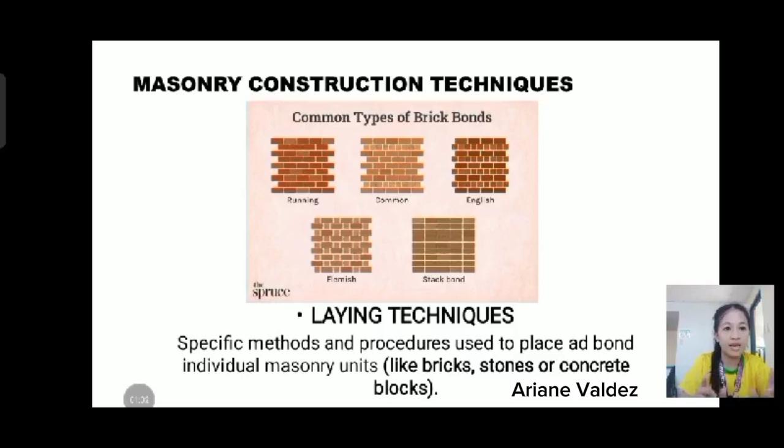While the image doesn't show any actual reinforcement, we can discuss how the different bonding patterns might lend themselves to our necessities, different approaches to reinforcement, and how their structure affects strength.

And now we have running bond. We need to remember that running bond is the simplest and most common bond. It only consists of lengthwise bricks and vertical joints between bricks.

Because we see that there are so many vertical joints, the running bond will benefit more from more frequent horizontal reinforcements like ladder or truss mesh, to prevent cracking along those weak planes. But that doesn't mean we don't need vertical reinforcement. We also need vertical reinforcement at the corners and intersections.

So running bond is used in residential buildings, garden walls, landscaping, interior work, brick veneers, or paving and patios.

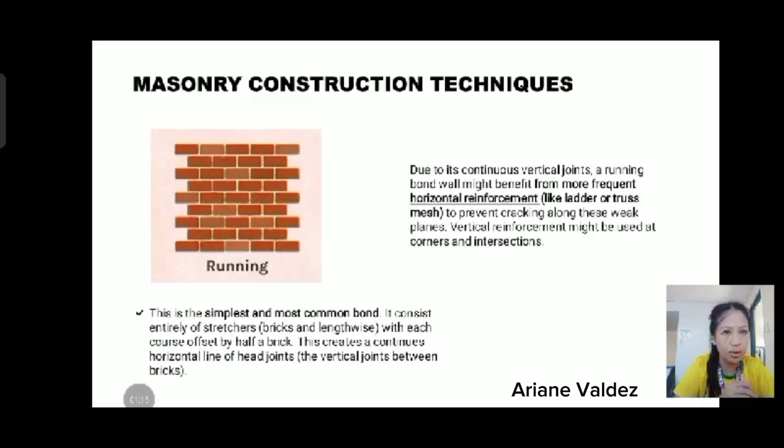Next we have the common bond, also called the American bond. This bond features courses of stretchers with a header course, bricks laid with their short end facing out, at regular intervals. The header courses help tie the wall together laterally.

So when we say laterally, it means one row has the long side showing. Then right above or below it, there are short ends of the bricks. So looking sideways, you have straight rows of either short, short, short, then long side, long side, long side.

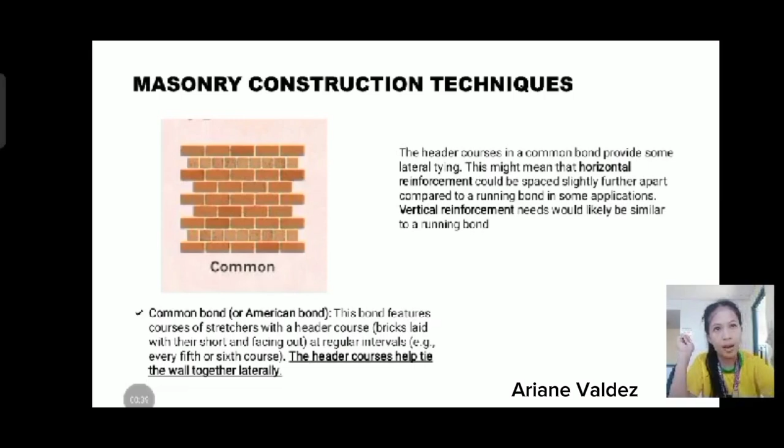Next we have English bond. This bond alternates courses of headers and stretchers. The head joints in the stretcher courses are centered above the stretchers in the course below. This bond is known for its strength.

So we see there are headers, then after the headers there are long bricks, alternating bricks. This alternating of headers and stretchers creates a very well interlocked wall, offering good inherent strength.

The robust interlock could potentially reduce the need for frequent horizontal reinforcement compared to running bond in some less demanding applications. Vertical reinforcement would still be important in English bond.

So this bond is used in load-bearing walls, engineering projects, and traditional buildings.

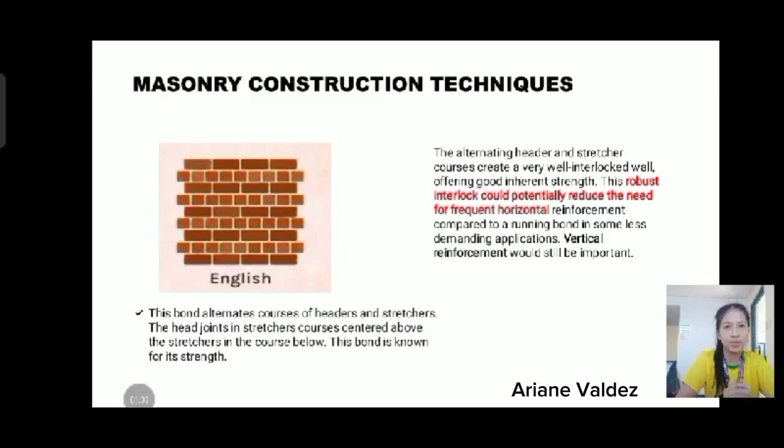Next we have Flemish bond. Here we see that the headers, or the small bricks, are in the middle of the long bricks. Similar to English bond, with stretchers, alternating headers and stretchers in each course create strong and well interlocked structures.

The potential for horizontal reinforcement might be comparable to or slightly less than running bond in certain scenarios. Of course, vertical reinforcement remains important.

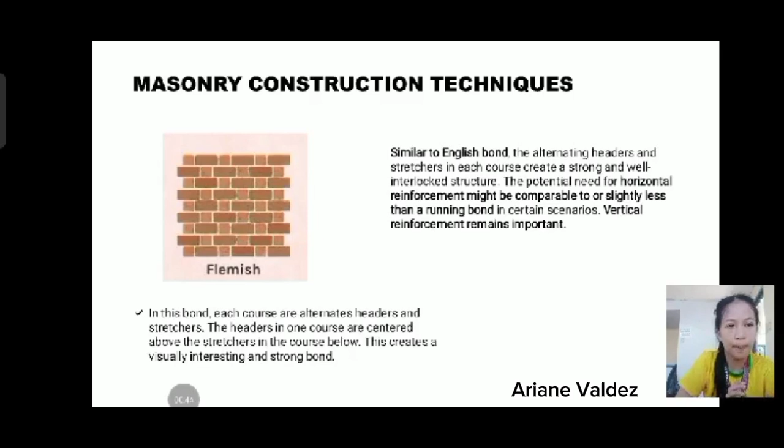And lastly, we have the stack bond. Stack bond is a purely decorative bond, where bricks are laid directly on top of each other with continuous vertical joints. It offers the least amount of structural strength on its own and typically requires additional reinforcement.

Because it has continuous joints, the stack bond has very little inherent lateral strength. Earlier we discussed what lateral means. It almost always requires significant reinforcement, both horizontal and vertical.

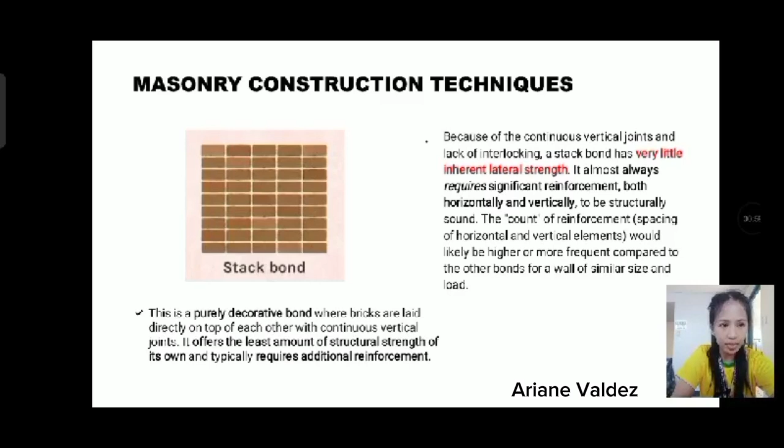Now we'll talk about their differences in strength. English and Flemish are generally considered the strongest inherent bonds due to excellent interlocking of headers and stretchers in alternating courses or within the same course.

They distribute loads effectively. Next is common bond. Common bond offers good strength due to the header courses tying the wall together laterally. Its strength is generally better than a running bond.

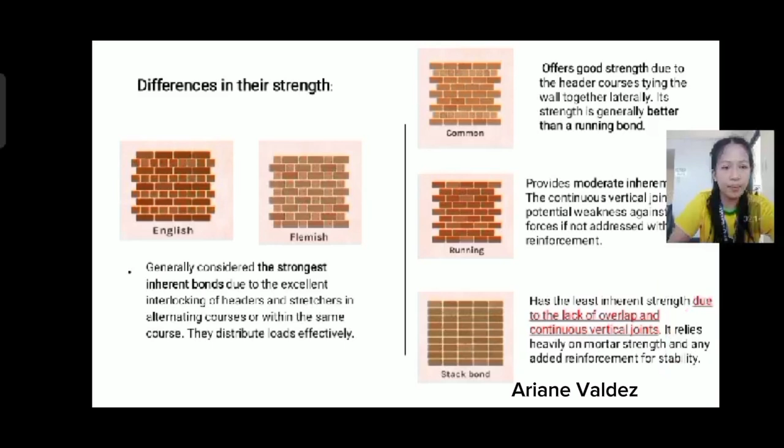Next is running bond. It provides moderate inherent strength. The continuous vertical joints are potential weakness against lateral forces if not addressed with reinforcements. Lastly, the stack bond has the least inherent strength due to the lack of overlap and continuous vertical joints. It relies heavily on mortar strength and any added reinforcement for stability.

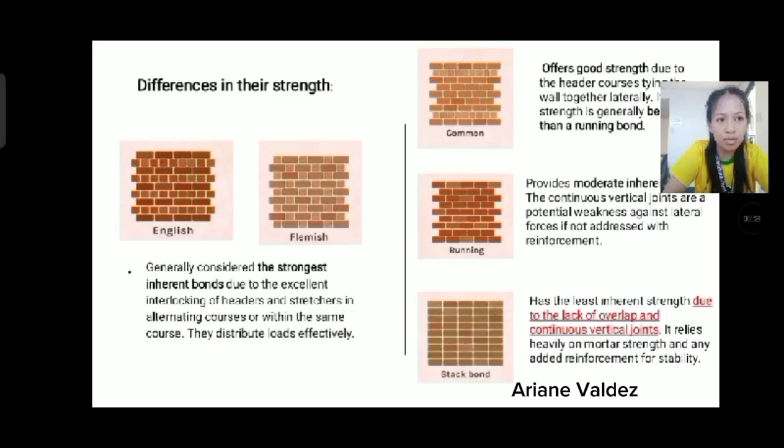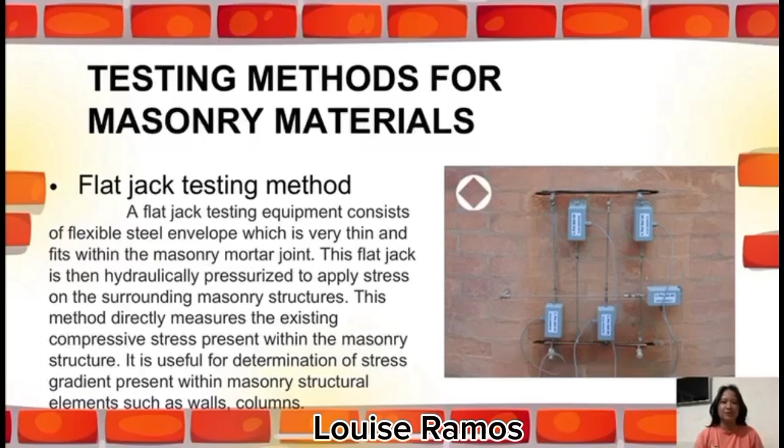These are the testing methods for masonry materials. The first one is the flat jack testing method. It works by creating a slot or cut in masonry, typically along a mortar bed joint. The next step is inserting the flat jack, then it is pressurized using a hydraulic pump, gradually increasing the pressure until it is restored to the condition before the cut. This method directly measures the existing compressive stress present within the masonry structure. It is useful for determination of stress gradient present within masonry structural elements such as walls and columns.

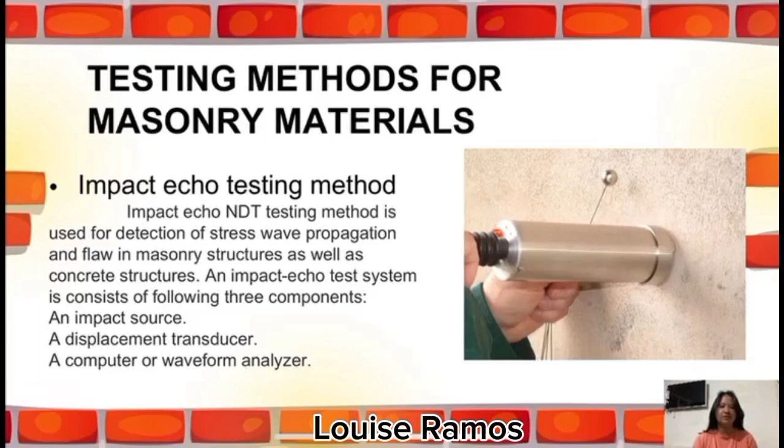The second testing method is the impact echo testing method. In this method, you tap a steel ball that generates stress waves which travel through the masonry material. It can be used to accurately measure the thickness of masonry walls and to locate internal defects such as cracks, voids, and honeycombing.

The next method is the impulse radar testing method. It uses electromagnetic waves to assess masonry structures by identifying voids, cracks, wall thickness, structural composition, and moisture content.

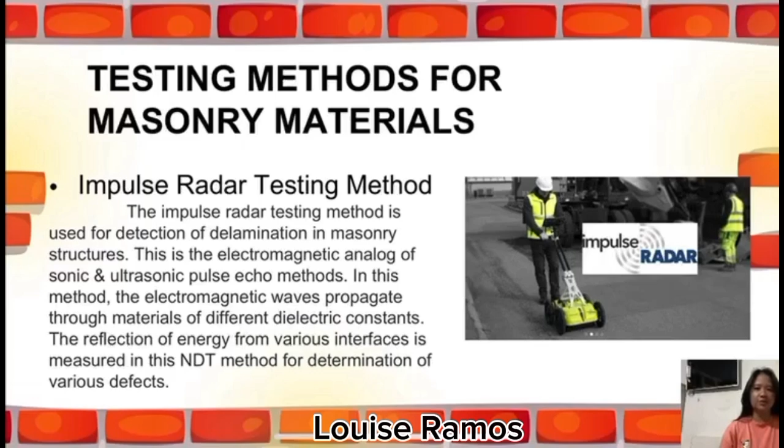The next testing method for masonry materials is infrared thermography. This non-destructive test is conducted to determine subsurface delamination in masonry structures. It is also used to detect internal voids and cracks. Infrared thermographic method gives a fairly accurate picture about the condition of masonry elements inside and can be effectively applied for larger surfaces.

Infrared thermography is a way to check for problems inside brick or stone walls without having to break them open. It uses a special camera that sees heat, because damaged areas like cracks or hollow spots have different temperatures than the rest of the wall. The camera can create a picture showing where these problems are. This is helpful for checking large areas quickly and getting a good idea of the wall condition.

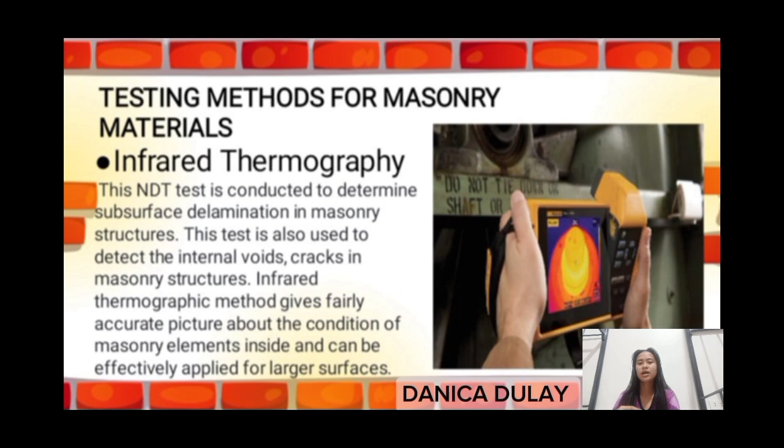Next, the borescope method for masonry structures. The borescope method is commonly used for concrete and masonry structures, and also for steel structural elements. A borescope is used to look inside inaccessible or small voids. It can be used to gain information on the depth of the outer layer of bricks or natural stones, and it can provide information on the filling materials in between arches. It may also be used to examine the mortar between bricks or natural stone.

So the borescope is like a tiny camera on a flexible tube. It's used to look inside hard to reach places in buildings, like the spaces between bricks or inside arches. This helps inspectors see how deep the bricks or stones are, what's filling the gaps, and how well the mortar, the glue holding the bricks together, is doing. So that's how helpful the borescope is for masonry.

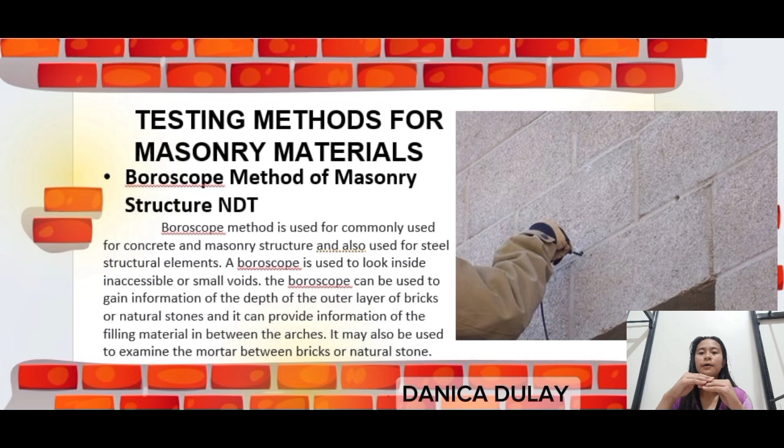Hello, I'm Marc Ian Locquiao, and I will be discussing quality control in masonry construction. Quality control refers to the systematic process of ensuring that all aspects of masonry work meet predefined standards, specifications, and guidelines.

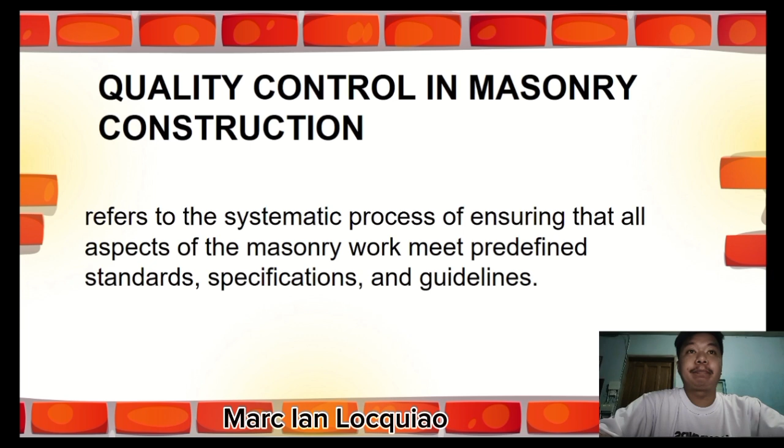So, itong overview ng key aspects ng quality control. Meron tayong 8: material selection and inspection, adherence to standards, proper mortar mix and application, inspection of workmanship, ensuring structural integrity, quality control of joints and movements, curing and protection, and lastly, documentation and testing.

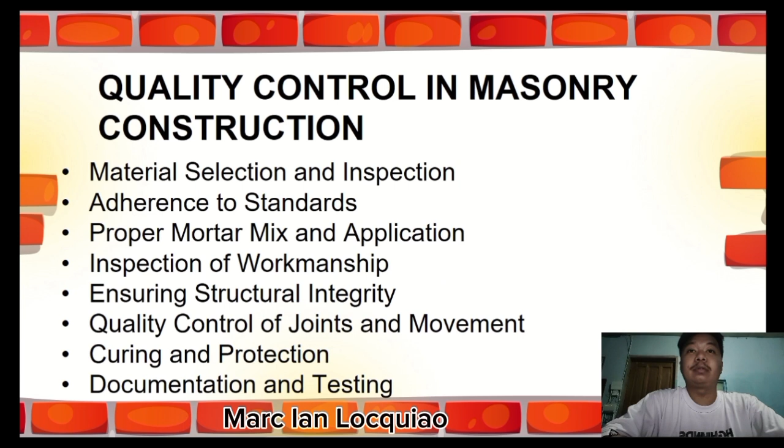So, let's start with material selection and inspection. Ensuring that all materials such as bricks, blocks, mortar, and reinforcements meet quality standards. This includes testing materials for strength, consistency, and suitability for intended purpose. Adherence to standards. Following established standards such as those set by ASTM or American Society for Testing and Materials to ensure that materials and construction practices are in line with industry requirements.

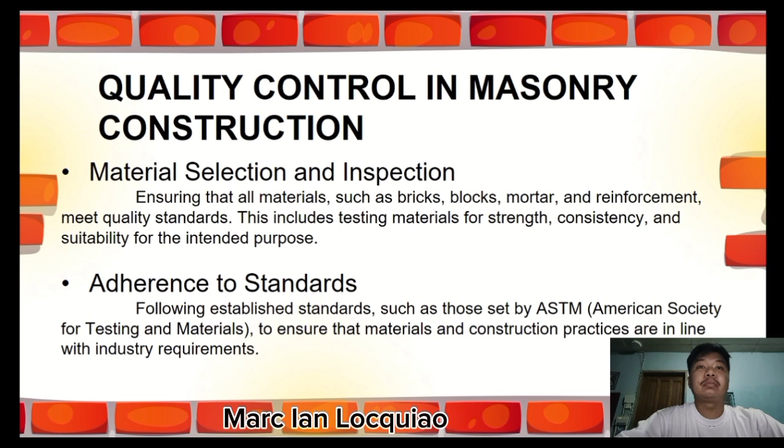Next, proper mortar mix and application. Controlling the mix ratio of mortar, ensuring that it is mixed to the right consistency and applied correctly to bind the masonry units. Inspection of workmanship. Regularly inspecting the workmanship during construction to ensure that masonry is laid correctly, with proper alignment, bond, and spacing between bricks or blocks.

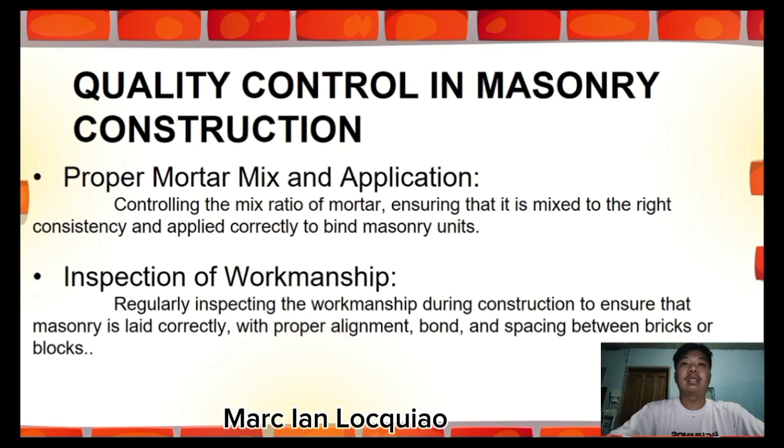Next, ensuring structural integrity. Monitoring the installation of reinforcements such as steel bars or mesh to ensure the structural stability of the masonry work, especially in load-bearing walls or areas subject to stress. Quality control of joints and movements. Ensuring that joints are properly spaced and filled, and addressing issues related to expansion or contraction of materials, which can impact the structural performance of the building.

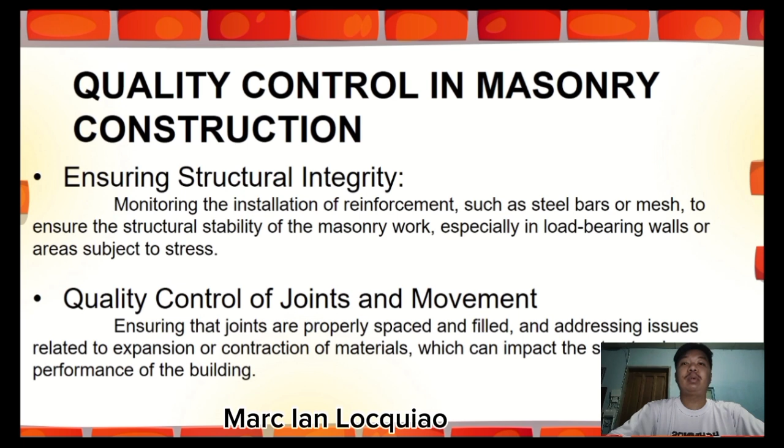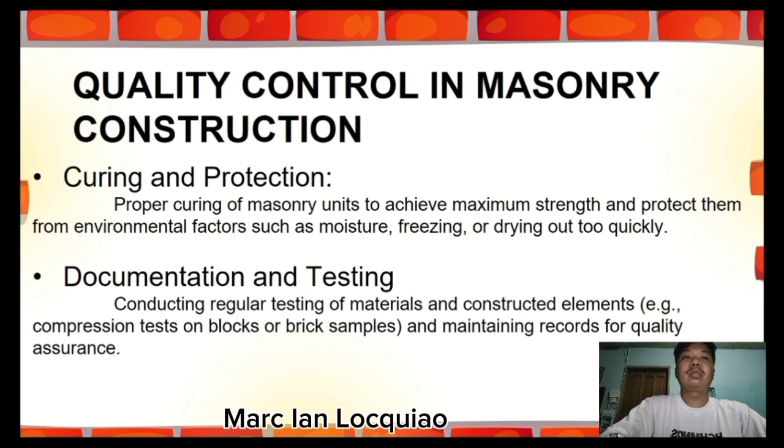Next, curing and protection. Proper curing of masonry units to achieve maximum strength and protect them from environmental factors such as moisture, freezing, or drying out too quickly. And lastly, documentation and testing. Conducting regular testing of materials and constructed elements, such as compression tests on block or brick samples, and maintaining records for quality assurance.

So good day everyone. My name is Giancarlo Yap from Group 1 and I'm here with you today to discuss masonry in structural applications and sustainability in masonry. So first things first, what is masonry? Masonry is a construction technique that involves stacking building materials like brick, stone, or concrete to create structures or walls.

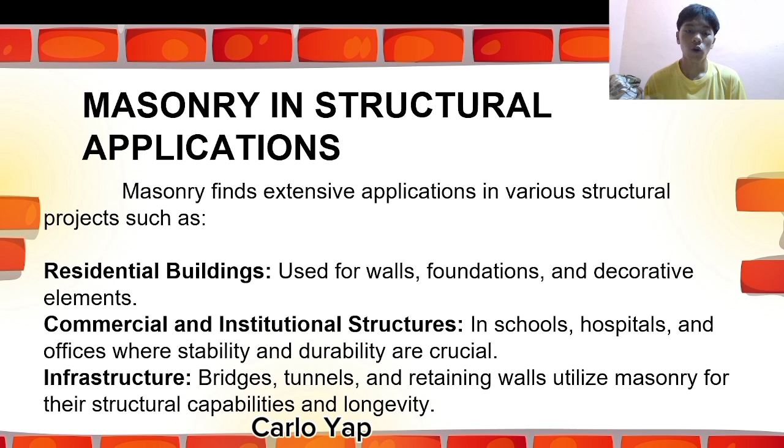Masonry is a sustainable building material. It is recyclable, energy efficient, and can withstand weather extremes. Masonry provides energy efficiency, long life cycle, lower life cycle costs, and resilience following natural and man-made disasters. Masonry is a restorative material with a low impact on the environment. Existing masonry structures can be improved to minimize carbon emissions from buildings.

So yung section nito is we're discussing the environmental benefits of masonry. So first, number 1 natin is yung recyclable. Masonry materials like bricks and concrete can be crushed and reused as aggregate in new construction or road base.

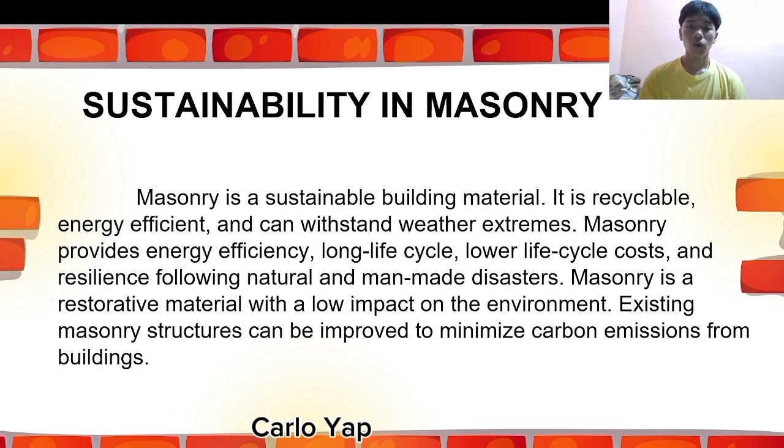So last is existing masonry structures can be improved to minimize carbon emission. So retrofitting older masonry buildings with insulation or energy efficient windows can improve their performance. So example is older concrete buildings in the Philippines could be retrofitted with insulation on the exterior walls or with reflective coatings to reduce heat absorption and lower cooling costs. So, yun lang po ang report ko.

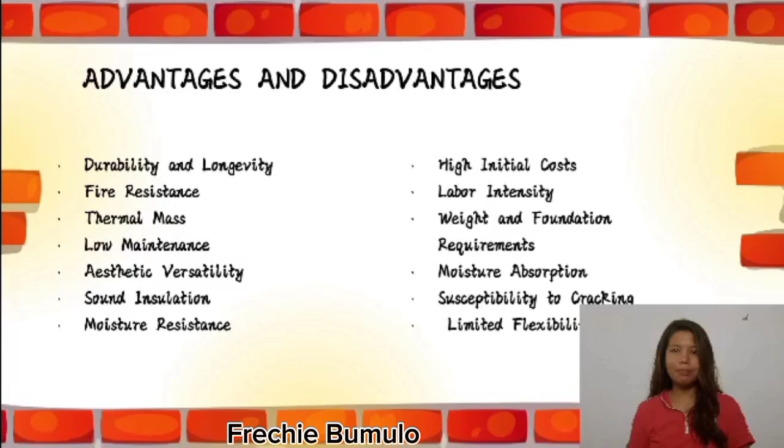First advantage is durability and longevity. One of the biggest advantages of masonry is its exceptional durability. Masonry materials are incredibly resistant to environmental damage. Brick and stone structures can withstand extreme weather conditions including high winds, heavy rain, and fluctuating temperatures without deteriorating. Also, it has a longer lifespan than many other materials. Well-maintained masonry buildings can last for centuries. This makes masonry an excellent investment for those looking for a long-term, low-maintenance solution.

Second is fire resistance. Masonry is inherently fire resistant, making it a safer choice for homes and commercial buildings. Brick and stone do not burn or contribute to the spread of fire.

This added layer of protection can help prevent extensive damage in the event of a fire and may even lower insurance costs. Isang example dito ay ang firewall. A firewall is a fire-resistant wall designed to prevent the spread of fire within a building, allowing occupants time to evacuate and preventing structural collapse.

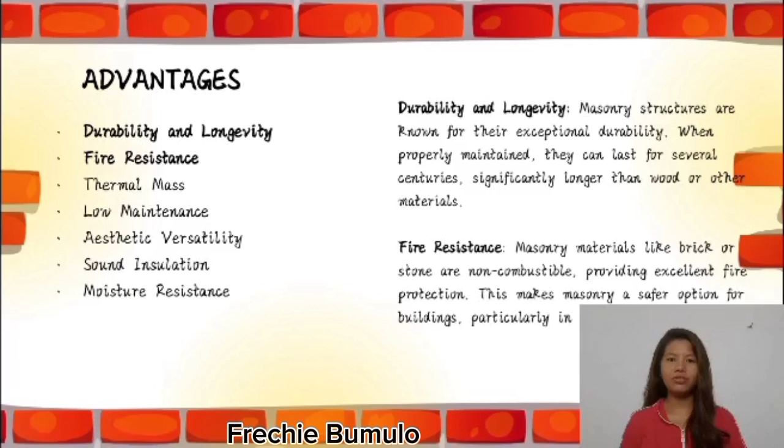The third is thermal mass. Masonry materials offer superior thermal mass, meaning they absorb, store, and gradually release heat. This helps regulate indoor temperatures, keeping buildings cooler in the summer and warmer in the winter. As a result, masonry structures require less energy for heating and cooling, leading to lower utility bills and increased energy efficiency.

Masonry creates a more stable indoor environment. This can be especially beneficial in regions with extreme temperature fluctuations as it helps maintain consistent comfort levels inside the building. So the number 4 advantage is low maintenance. Masonry structures require significantly less maintenance. Masonry only requires occasional cleaning and repointing of mortar joints to maintain its appearance and structural integrity.

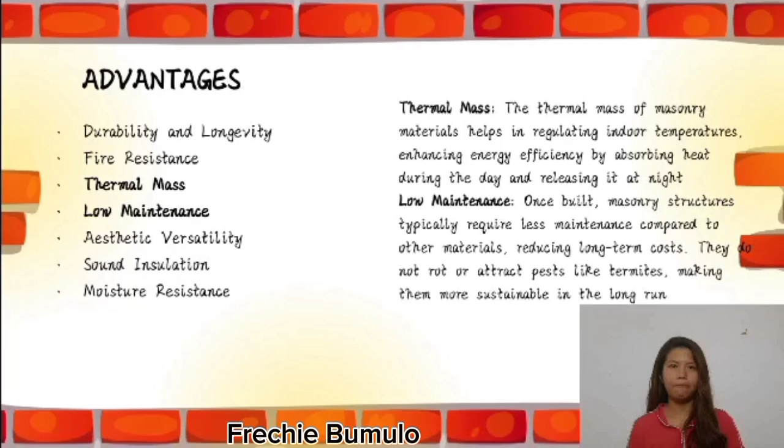Though masonry construction can have a higher initial cost, its longevity and low maintenance requirements make it a cost-effective choice in the long run. Homeowners save money on repairs, replacements, and energy costs over the lifespan of the building, making masonry a smart financial investment.

Number 5 is aesthetic versatility. Brick, stone, and concrete masonry offer timeless beauty and design flexibility. Masonry maintains its classic appeal for generations. Whether used for traditional homes, modern commercial buildings, or historic restorations, masonry can be tailored to suit various architectural styles. Masonry also comes in a wide range of colors, textures, and finishes, allowing for customization that enhances a building's curb appeal. Masonry's natural beauty remains intact with minimal upkeep.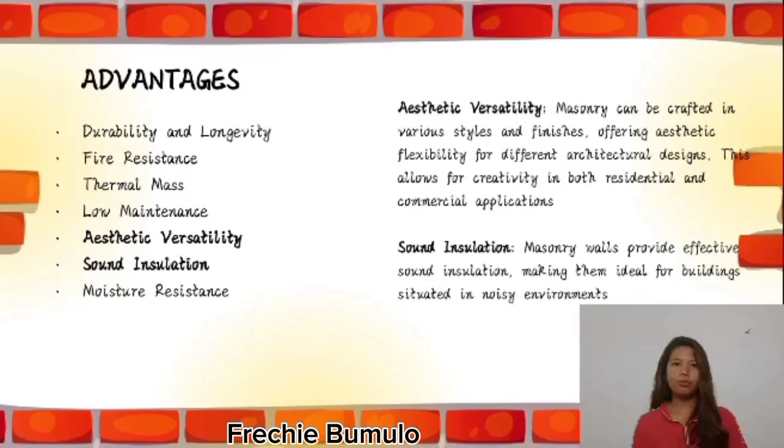So, number 6 is sound insulation. Masonry provides excellent sound insulation compared to wood or metal structures. The density of brick and stone absorbs sound waves, reducing noise transmission from outside sources such as traffic, construction, or loud neighbors. This makes masonry ideal for urban environments, multi-family residences, and commercial buildings where noise control is important.

Lastly, it is moisture resistance. The dense and watertight nature of masonry materials safeguards structures and ensures its long-lasting durability. Although relative humidity can influence moisture levels to some extent, the acceptable moisture levels in masonry vary. But generally, a moisture content below 20% is considered safe for indoor brick walls.

For exposed brickwork and concrete, 5% is a standard moisture content. Internal brickwork and concrete typically have lower acceptable levels with 1% and 3% respectively. It was according to CIBSE Guide A Environmental Design. Masonry work excels in resisting moisture, preventing issues like mold and decay. This moisture resistance reduces the need for extensive maintenance and repairs, providing peace of mind.